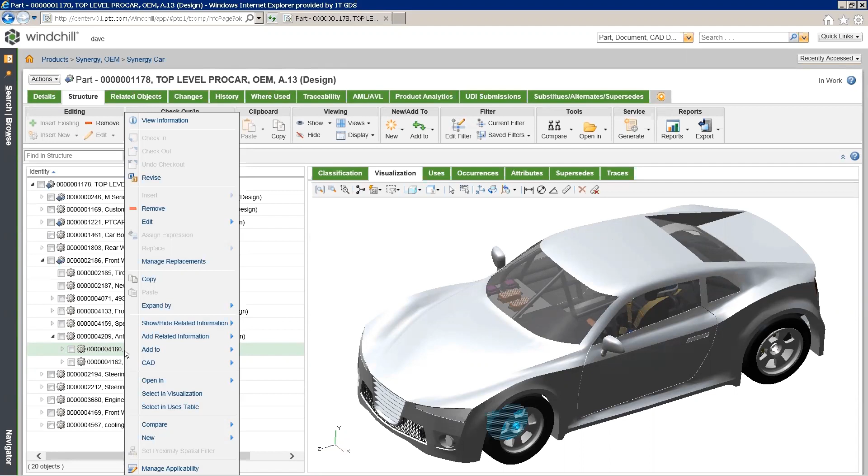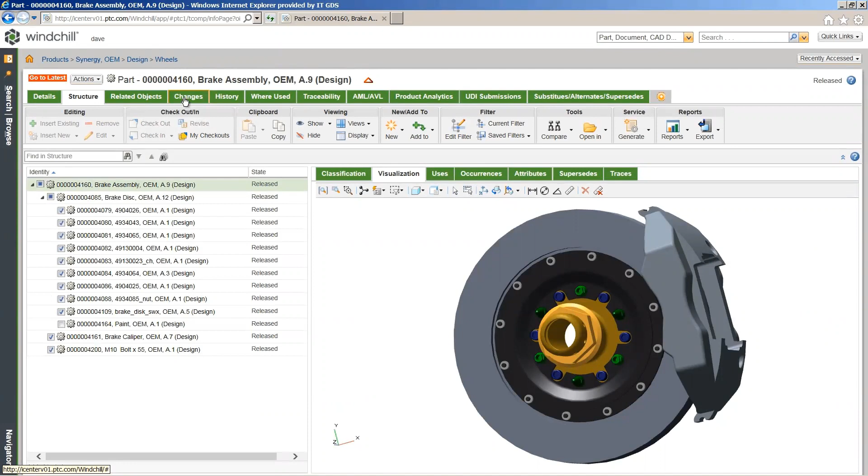Right, so we're going to go ahead and open up this subassembly. And if you think back to the PowerPoint a minute ago and those indicators that we had, you'll see the same thing here. So we have the red triangle at the top telling us that a change is underway. We also have a go-to-latest indicator on the left saying that we're not actually looking at the latest version of this thing. Now we're going to start today in the changes tab.

And this is where we're going to go to really look at the changes on a granular level. So the first table that we have is issues and variances. If you think back to that diagram, this is your problem report. This is where we're defining the problem that's happening and we're explaining what's going wrong.

Below that, we have change requests. So that's where all of our information pertaining to this change is. And this is the resources that really we need to make this change happen. The last step there is the change notice.

And in this case, in Windchill, we actually break it down into two kind of subcategories. So the first one, affected-by change notice, this is where we're committing the personnel and the resources and the changes are happening. The difference between affected-by change notices and resulting-from change notices is just that it's the same objects in both tables, but resulting-from, you're going to see the new version of, let's say, a part or a document that's being changed. Affected-by, you're going to see the version pre-change. So affected-by is pre-change, resulting-from is post-change. That's really the difference there.

Now, today, we're just going to start by looking at this problem report. So right from that changes screen, I can just click on the problem report and you'll see here, this is where we have all of this information around this problem report. So all of the details, all of the attachments. I have tabs for the process, for the history. So this is the one place I have to go to see everything for this problem report.

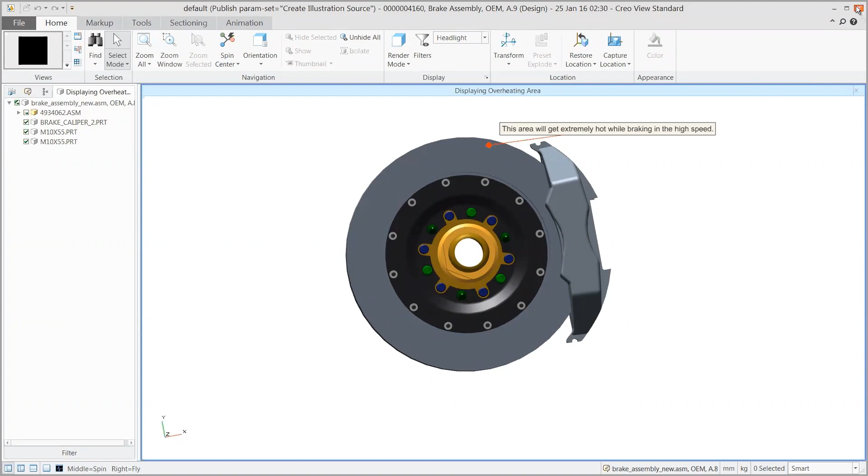Now that we know what the problem is, because we looked at that annotation in the problem report, we can also take a look at some affected end items. This is basically saying we're working on this brake disc, which is an end item within this assembly. If we scroll down, you can see associated process objects and reference objects — different aspects for the problem report — but these process objects are actually where we get into the change request. I don't have to go back to the change home screen; I can just click on this associated process object, and it will jump us into the change request.

Now, what you'll notice just by looking at this is the change request has really the same information as the problem report, but it's a slightly different type of change object in Windchill. The interface, however, is the same — same tabs, set up the same way — which is really nice for whoever's going to be working with changes in Windchill. It's consistent; you don't have to relearn where everything is for each step. It really just looks the same. Navigation's the same, the interface is the same, so it's going to be easy to learn.

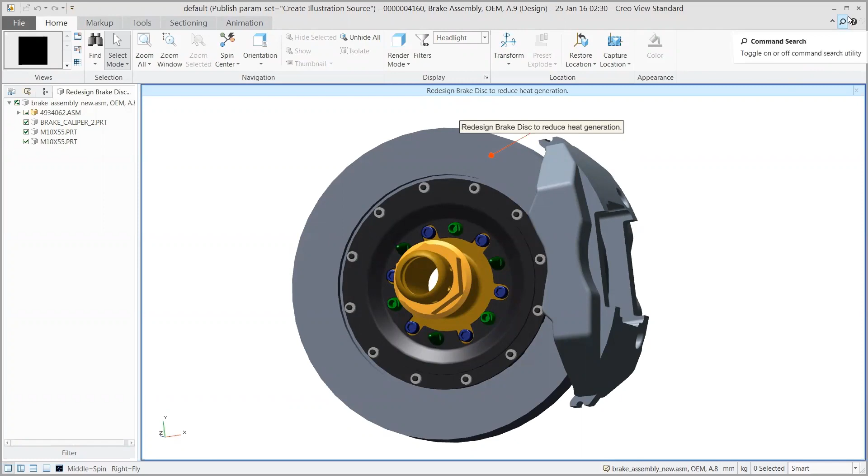Now, the difference between the problem report and the change request is that the change request is really where we go to get a good understanding of the change impacts, so you can get all the information you need to solve the problem and understand the future impact of this change, all in one place. If you look at the affected objects category, we have another associated annotation — in this case, another Creo View visualization. While the first one documented the problem, hence the problem report, here in the change request we're making use of Creo View once again to say what actually needs to be changed. In this case, it's to redesign the brake disc to prevent it from overheating. We may not even know specifically what's going to change yet, but we're stating generally what needs to happen to mitigate this problem. What you're seeing is the ability to put different annotations and have different information for each step of this change process.

If I scroll down a bit more, you can look at the affected objects — this gets back to those WT parts I mentioned before. In change processes, what's so nice about them is Windchill will automatically gather the resources that could be impacted by this change. I don't have to go through and manually find that information — that takes a long time, and there's also a human element where naturally things just get missed.

Automating that through the use of WT Parts, which Windchill just does automatically. It says, if you're changing this document in this bucket, then I know that everything else in that bucket could be affected as well, and it adds it to this list for us. So I'm not manually tracking anything down, Windchill is telling me what could be impacted by this change. Doesn't mean that it will be, but it's saying these are the things you need to look at and then determine if they're going to be affected or not.

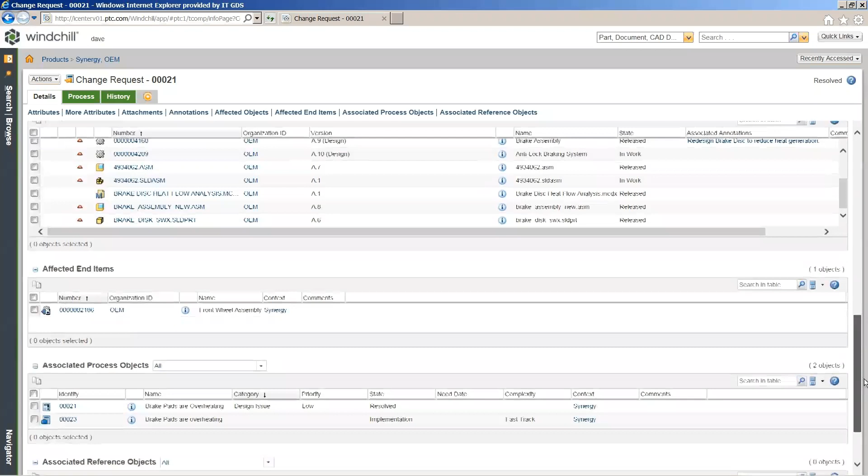Below that, we have our associated process objects. So right from this screen, just like we did before, bouncing from the problem report to the change request, now we can click on these, and this is going to take us to our change notice. I'm just going to click on the information icon to do that, and then you'll see at the top here that now we've moved into this change notice.

Once again, the interface is really the same, right? The layout's the same. I have my details, in this case I have my implementation plan, and then process and history, which we've seen on both of the previous change objects as well. So that's standard regardless of what we're looking at.

Now at this point, we've gone through the problem report, we looked at the change request, and really we know what's essentially being changed. We know what's going wrong, we know what needs to be fixed. So at this point, we're going to look into the actual execution of this change.

I'm going to start in the process tab, because this is where I'll go to see the members as well as the workflow for this particular change. As I mentioned before, there are standard workflows that are built into Windchill. However, they are very configurable, so this is a pretty complex workflow.

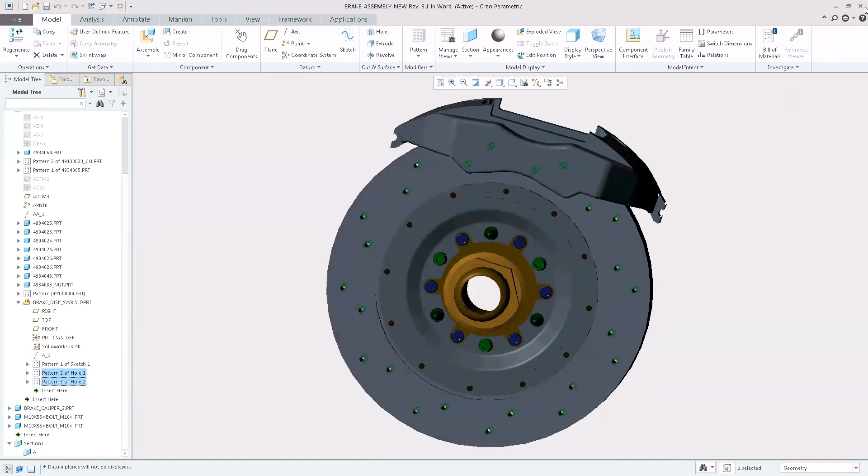The nice part about doing it that way is since everything is from that one screen, right from that change notice, someone would be able to just look at that model. They know whenever they go to look at the model, they're looking at the right one, because it's the one being used in that change process. They're not going off in another window searching for a part, which may or may not end up being the correct part. This makes sure you're looking at the right thing.

Now moving back to the home screen, we'll go ahead and start to complete these tasks. The first task here is just to complete the change notice task: it's to update the bill of material for the brake assembly. This has been assigned to me, so I'm going to go ahead and open up the task assistant, and we're going to run through this.

I always like to use the task assistant because for me it's nice to have that box there to keep me on task. The other nice part about it is the task and the subject are both hyperlinks. If I get off track, it's going to take me back to the actual change task.

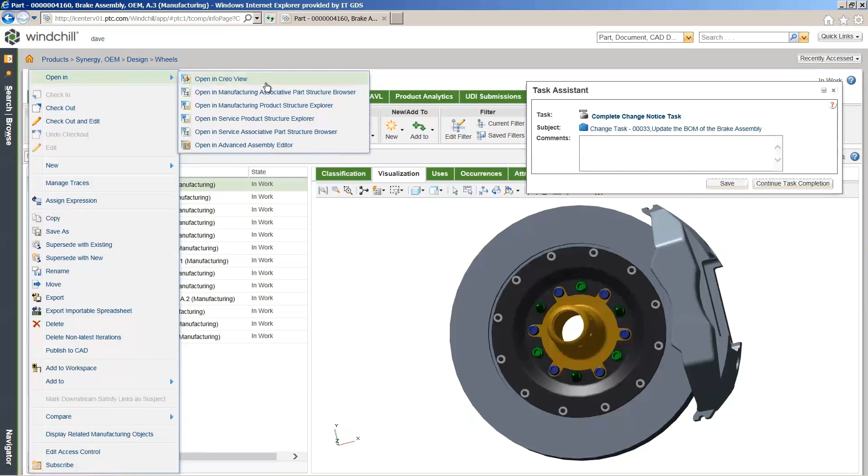So for this one, we'll go into the affected objects, and this is my brake assembly. My task is to update the BOM, and to do that I need to open up the manufacturing associative part structure browser, because the design BOM on the left has already been changed, already updated, but I have a downstream bill of material for manufacturing, and that's really what my task is: to update that downstream MBOM. So that's exactly what I'm going to do here.

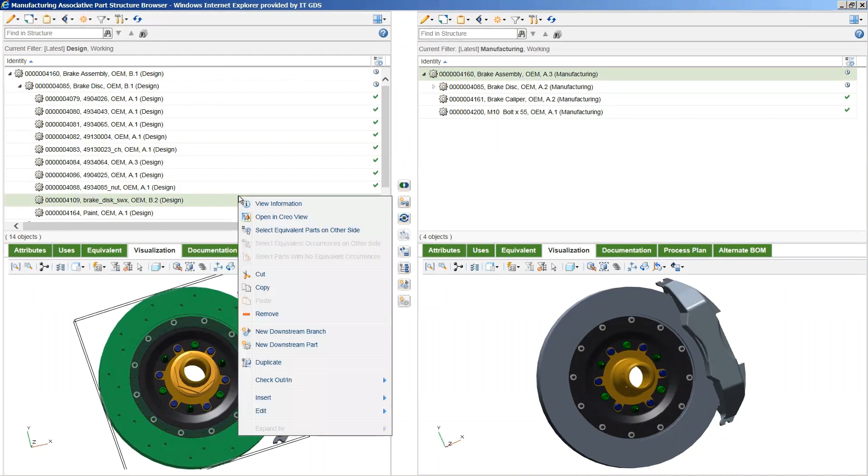It's really simple honestly. All I'm doing is selecting the equivalent parts on both sides, between the two BOMs. You can see in the icons at the right of each column there are green check marks that say there's a matching model on both sides, both of them are equivalent. And then the clocks say they're not actually in sync. So that gives me a clear understanding of which ones need to update.

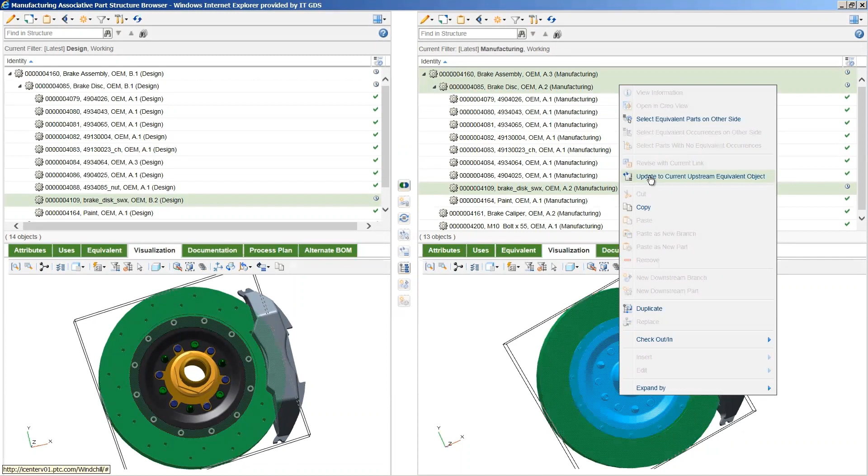So what I'll do is just select them all at once. Then you can see there's an option to update to the current upstream equivalent object. What that's going to do is take my MBOM, take whatever is obsolete, and update it to the matching version on the new and updated model. You can see in the visualization on the bottom, it's literally the click of a button, and those updates are made for me.

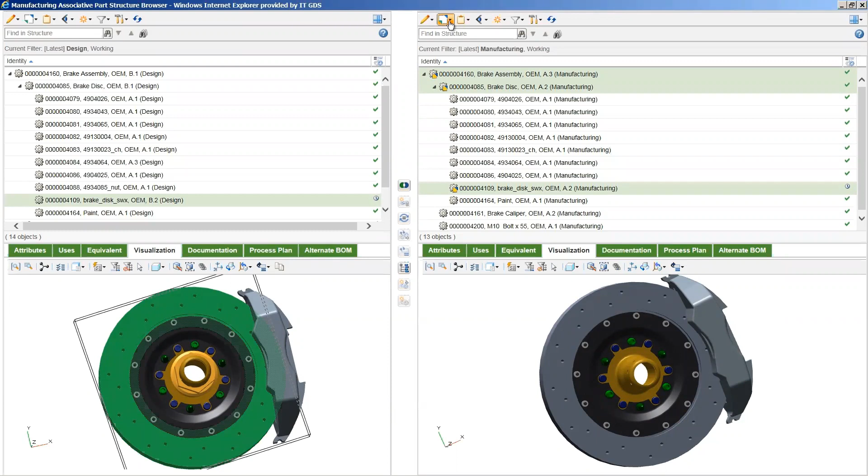Now, if you've worked in Windchill before, you already know how this process works, but we do use a check-in and check-out system. As we go to make changes on anything, you check it out. While it's checked out, I can make changes, nobody else can, so we're preventing the possibility of last save wins, anyone overwriting each other's work. When I made those changes, Windchill automatically checked this part out for me, so now that I'm done with them, I'll just go ahead and check it back in.

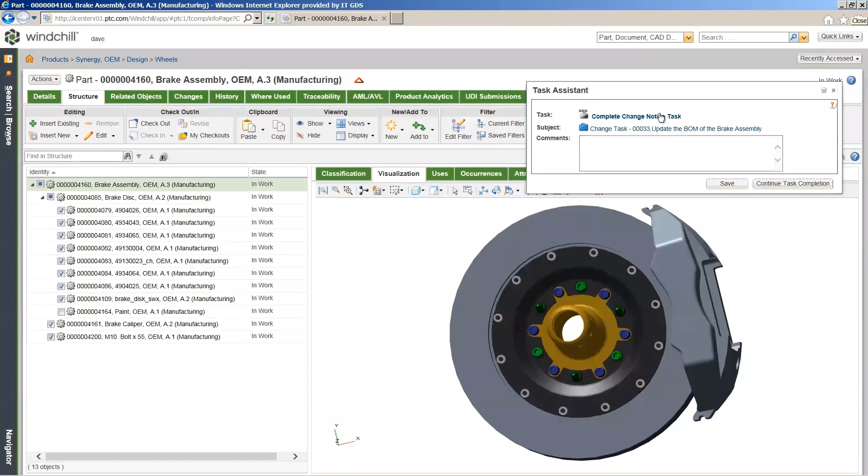And that check-in is successful. I see my notification, so we can now go ahead and jump back into this task, because that's really what I needed to do. I needed to update that MBOM.

I'm just going to use that task assistant to take me to the task and leave a comment. It's always good to leave comments so everyone else knows what you did while you had it checked out. Then once I'm finished with this comment, I'll go ahead and complete the task and we'll be good to go.

For the last portion of this, we're going to sign in as a different user. This time it's going to be Pat, the product manager. He has a different task, which is to actually review the changes to the bill of material that I just made as Dave, the design engineer.

Now, what you'll see is in this home screen, I already had this task. It was automatically assigned to Pat once Dave completed his task. We're automating as much of this as possible. That's what makes it more efficient. That's what ensures that we don't make mistakes and that nothing gets lost in translation. So automate as much as you can. Of course, you have options as to how much of it you do automate, but if you can automate, it's definitely going to help.

So here, I'm going to go in and just review this change. We'll go to task completion. We're going to say that we reviewed it, and then I can just add comments, and I'll tell Dave, you did a great job, thanks for the help. Then we'll complete this task.

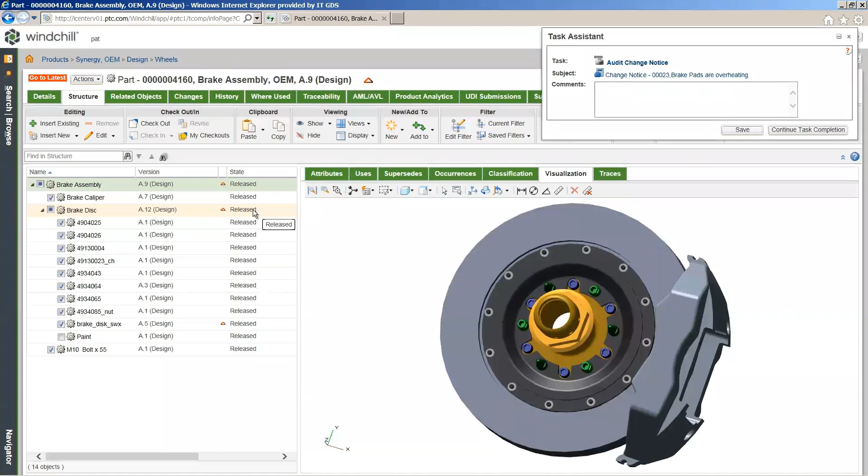So what you can see here is right now, we've gone through the change, we've reviewed the change, we've approved the change, we've updated the bill of materials. The last step that we really need to go through is to actually release this to everyone who's going to be viewing it in Windchill. So maybe these changes are done and then you're not releasing them right away. You might be setting a date, a release date. That's exactly what we're going to do here. So the changes actually happen. We've done really all of the work.

So all I'm going to do now is go to the latest version, and basically we need to just set the effectivity date. I'll come down to this resulting from change notices. Remember, these are the changes after they have actually been updated. That's what this category is.

We'll go to the implementation plan, so now you can see step 1, 2, 3 have all been completed. I'm just going to come down to the resulting objects table. And like I said, we're going to say, I want to set the effectivity date. This is really going to be the date where these are going to actually be released. Everyone is now going to be viewing this updated version, which we'll set a certain date for. This is going to be completely chosen by you. We'll do it for each one of these.

Looks pretty good. And then the last step is just to set the state. Whenever it hits September 17th, then they are all going to change from in work to released. Pretty straightforward.

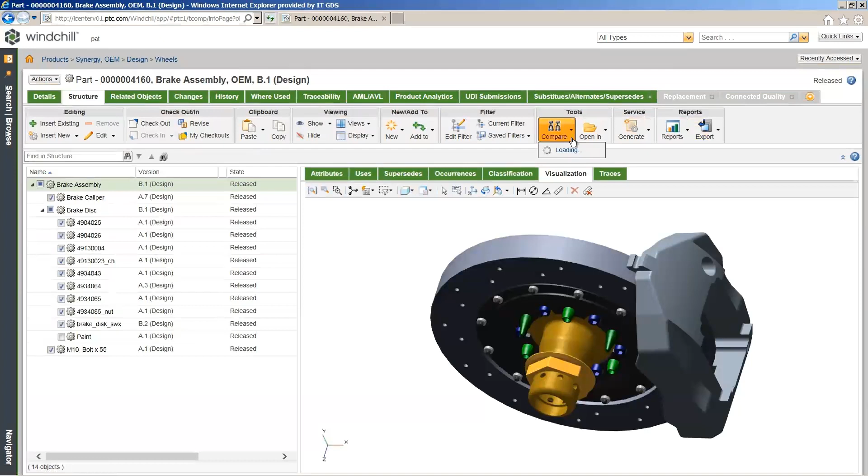And you can see here, if you've never used it before, we have a compare part structure option, which I can use to compare the current, new, latest and greatest updated version to the original baseline version. And you can see how this has changed over time.

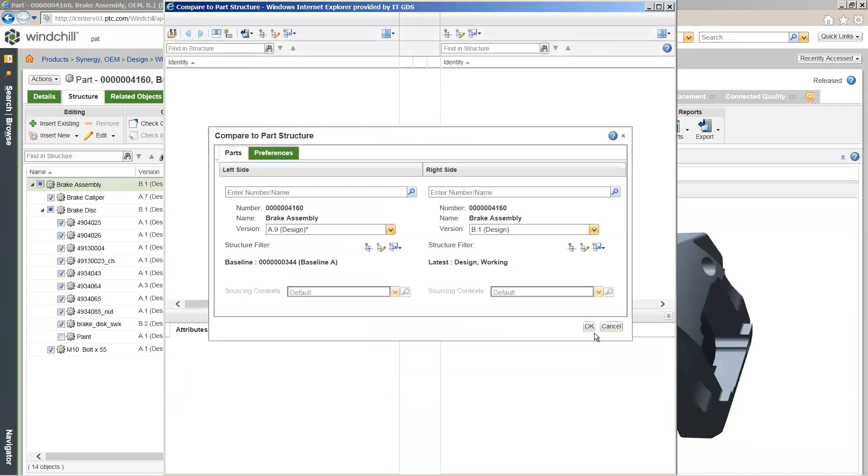But that really is change management at a very high level in Windchill. You can see this, A.5 was initial. You could see in blue what's changed within these part structures. You can see in the visualization clearly what these changes are. But that's really all there is to it, guys. At a high level, Windchill does a very good job with change management.

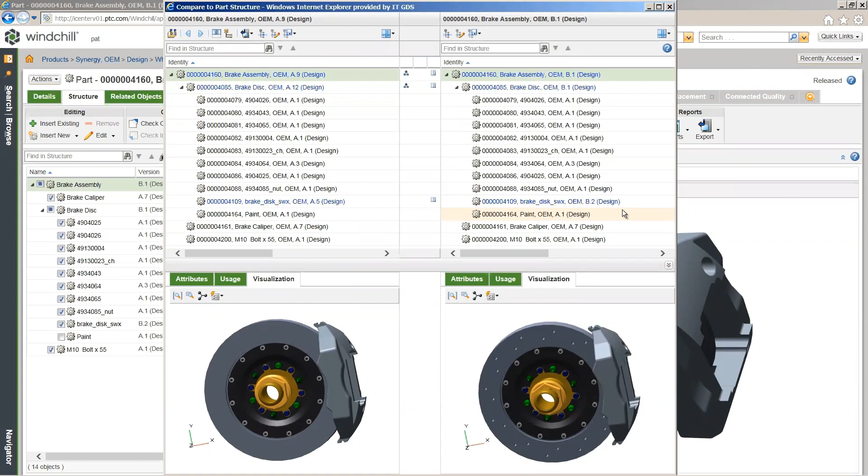We walked you through that process today. So now that you have a better understanding of what that process looks like, I just have a few more points that I'd like to hit on to summarize what this can do for you.

So with all of your data residing in one PLM system, it enables you to react quickly to pressures that your company faces. Using workflow templates, Windchill automates a lot of these processes for you, and that accelerates your problem solving. The process of implementing changes becomes way, way faster.

It also makes the change management process extremely efficient. So everybody that's involved with changes knows exactly what their role is in the change process, and they have all the tools to execute on that.

On top of that, managers have full visibility into each and every step of that change process and can make more informed decisions on future changes. Lastly, because of this increased visibility and full digital traceability, everyone is working together to make more informed decisions in Windchill, and that's going to increase your efficiency and increase your product quality.

So that's all that I had planned to go through for this demonstration of Windchill Change Management. Thanks, everyone. Excellent, Zach. Great presentation, great demo.

Just a couple of points about Windchill. It's scalable. So when you get into change management, you're definitely into the PLM side of Windchill. But Windchill can also be used as product data management. So there may be some of you out there that are thinking that this might be something that you would use in the future, but you're not using a data management system, or you're using your own type of system that might be kind of clunky.